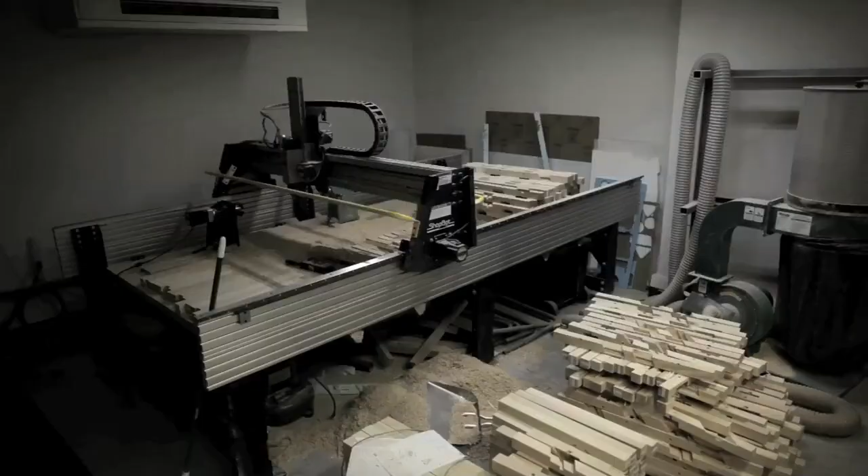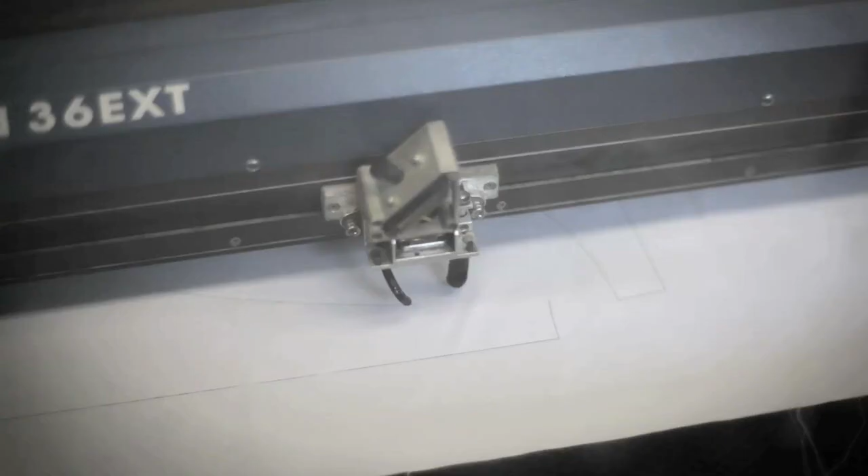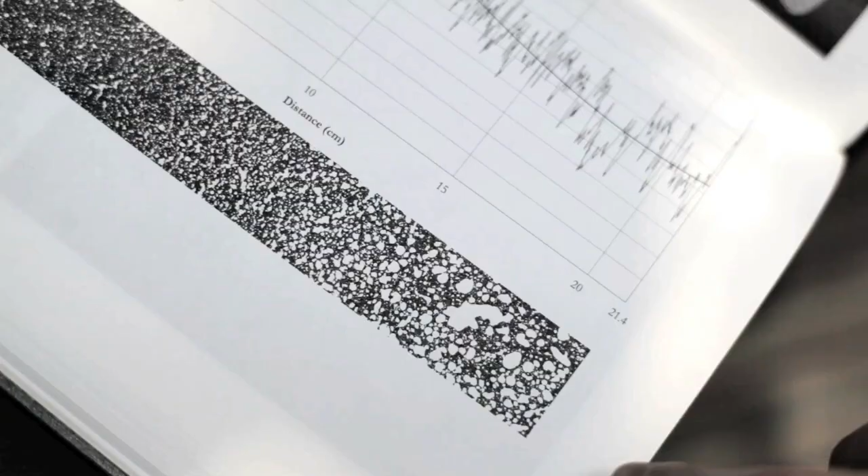MIT is a very different kind of institute. Instead of becoming the recipients of building industry culture, we can now change building industry by the kinds of experiments we're doing in school. MIT has a variety of departments that are so powerful they have the potential of radicalizing what we do in design and in the architecture department. Even the way we've structured our curriculum around workshops and collaborations fosters this kind of cross-disciplinary platform. So we're situated perfectly for the kinds of things that only MIT can do.

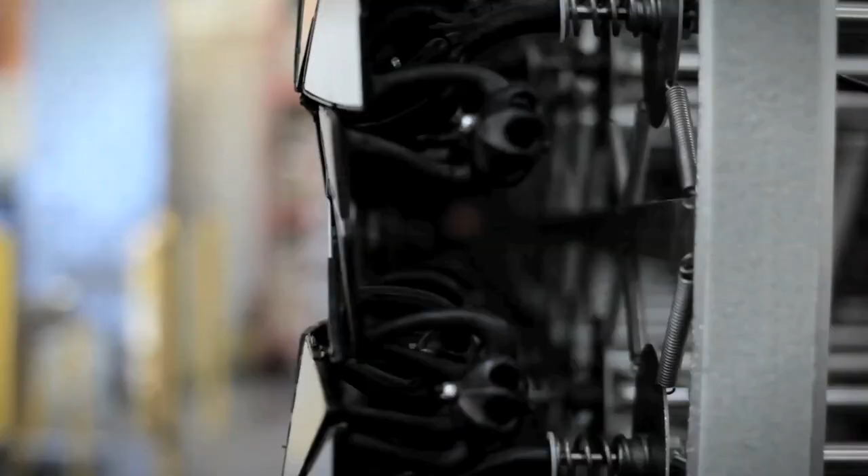The invention of human artifacts of any kind always consists of three elements: the geometry, the process, and the material that constitute that artifact.

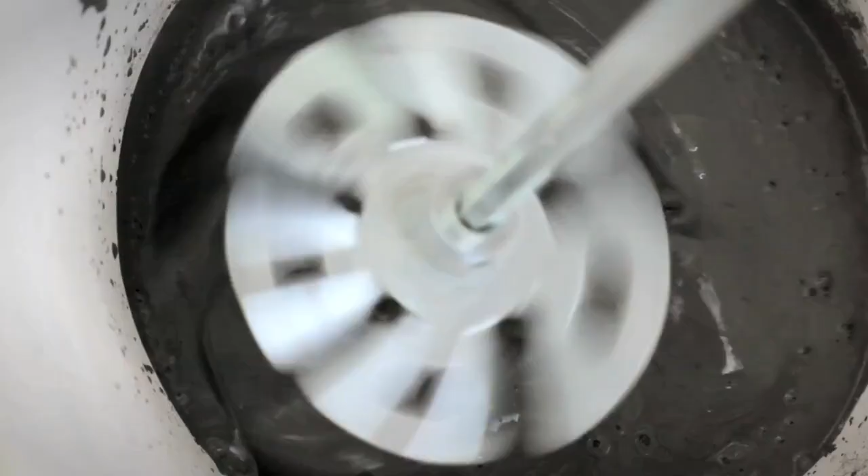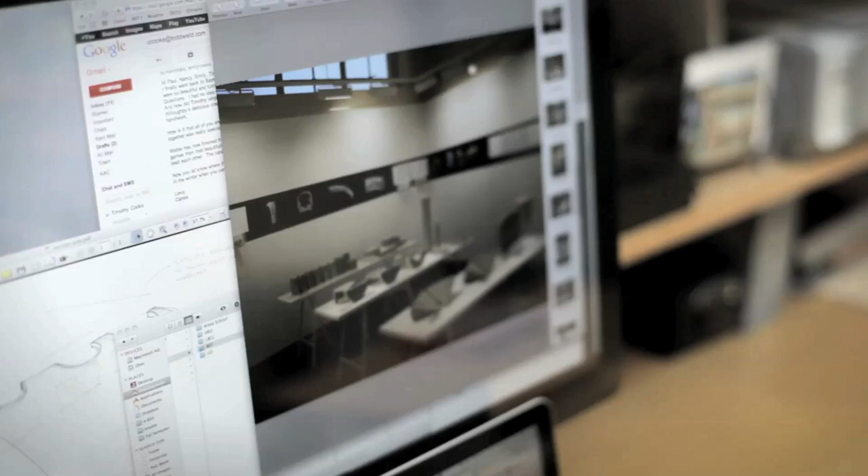It's very clear that new materials engender new forms, and architectural design benefits from addressing and applying new materials in an informed way. The Emergent Materials Group and the Urban Metabolism Group share a central interest in materials for the built environment. Lately, we've been working a great deal in the area of foamed materials, especially foamed cements and concretes.

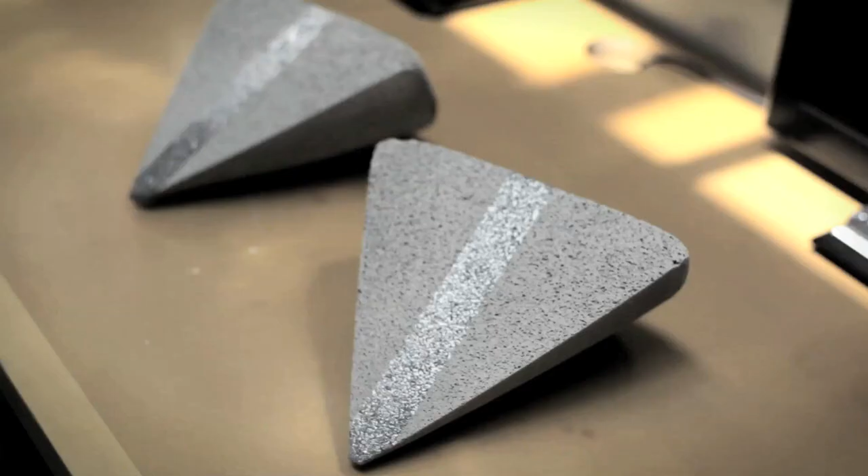Typically, a beam in bending is going to have the greatest amount of stresses on the top and bottom, so we can reduce the amount of material on the interior of a beam.

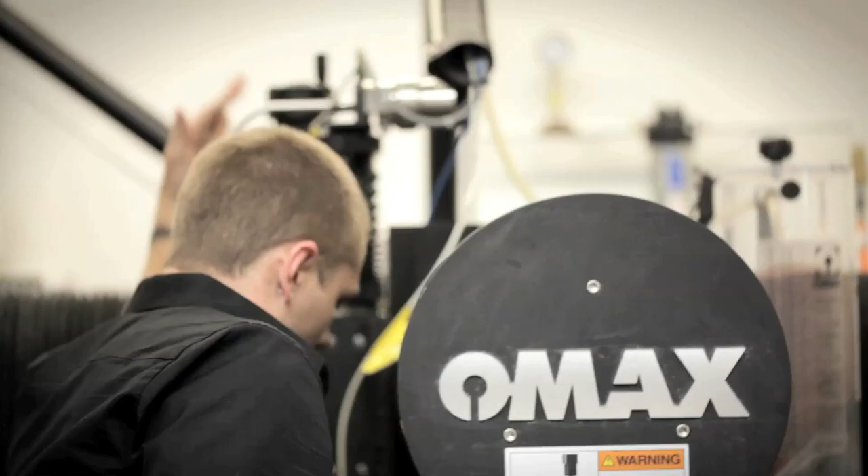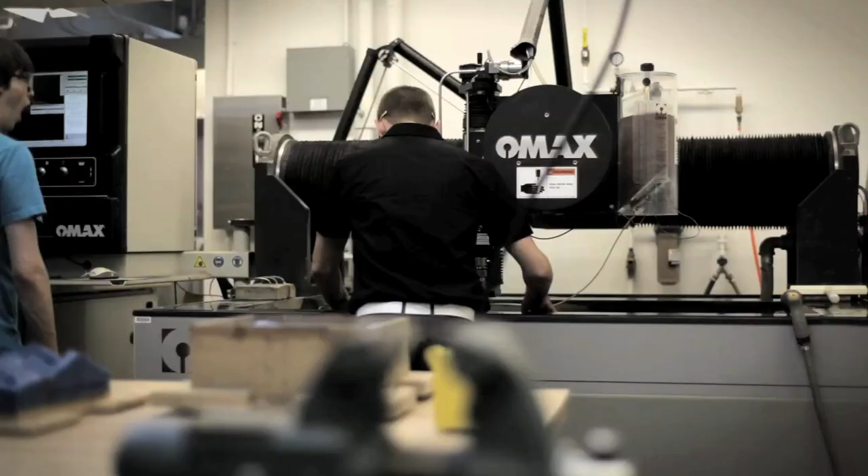The work really tries to address that there's two main paradigms throughout almost every industry. One paradigm is what can you design, what can you compute or analyze, and the other paradigm is what can you physically construct or what can you build.

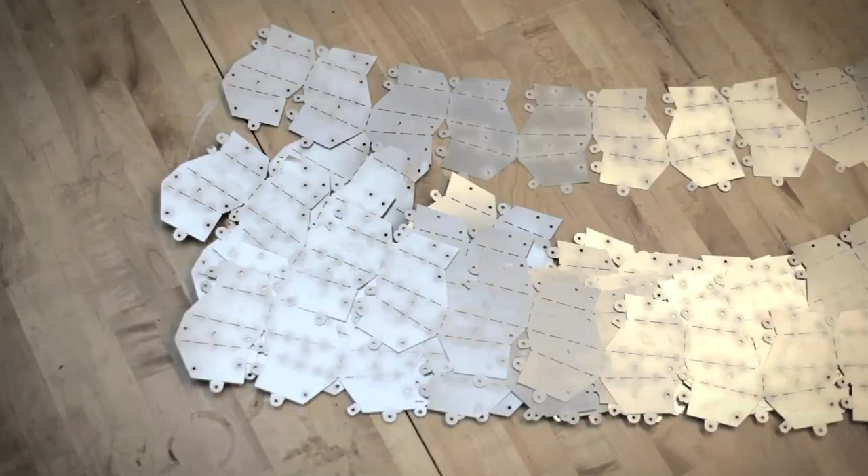The work really tries to traverse all scale lengths. It tries to work from the nanoscale, which is traditionally where we see self-assembly in biological and chemical examples, and it tries to bridge that and say, can't we use this phenomenon of self-assembly as a new paradigm for building things at large scale?

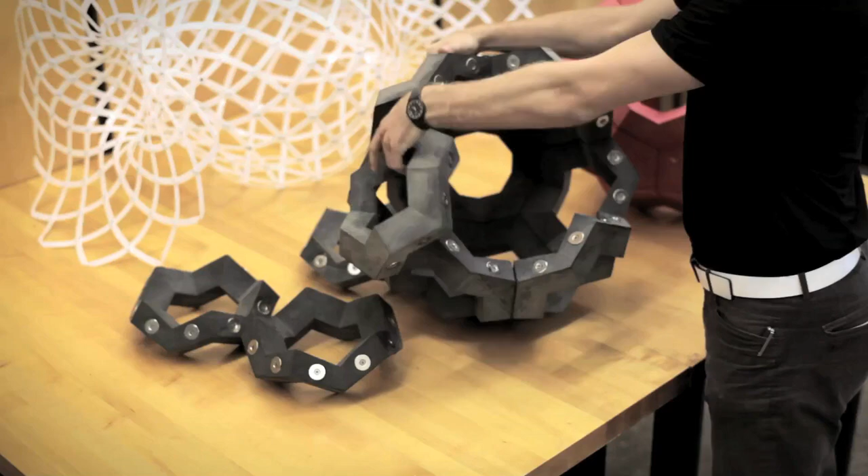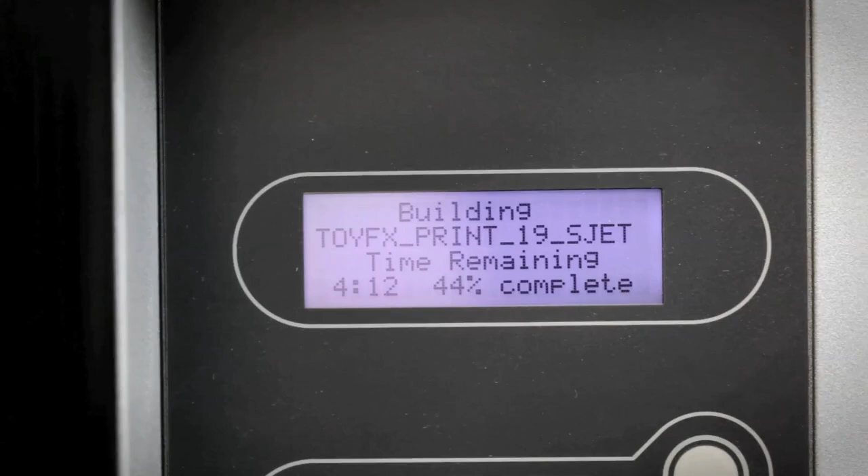We work with any type of material, synthetic or natural, and really try to design specific geometries that have materials in mind. When you design those two together, they can respond to energy. The energy sources can be heat, shaking, gravity, pneumatics, electronics—you can use any type of energy. When you mix that with the geometry and material properties, they can respond and change state.

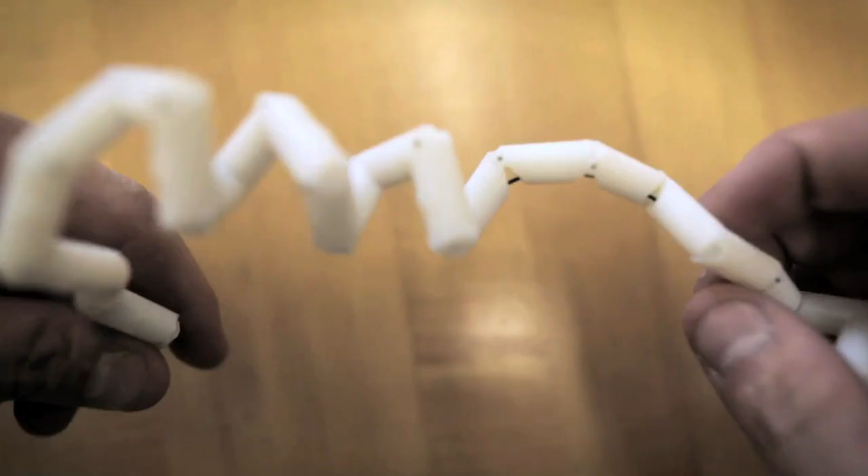Primarily, it will first be applied in extreme environments, scenarios where it's difficult to build.

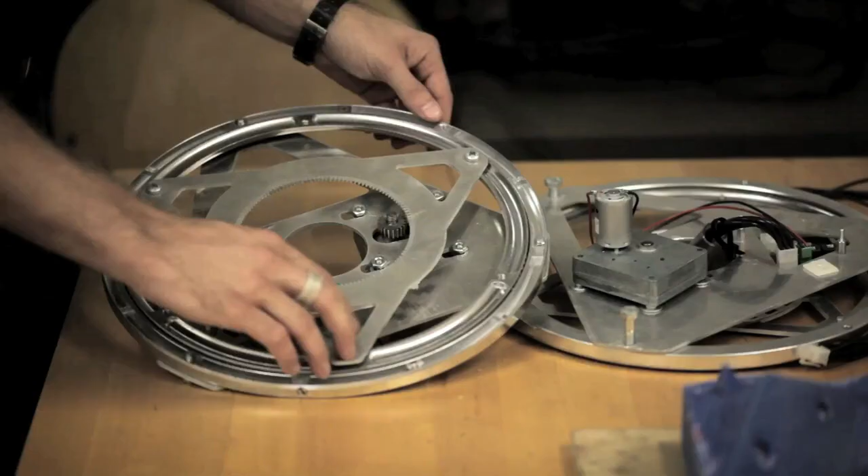The research and the practice is really about cross-disciplinary collaborations between designers, scientists, and engineers, working on this phenomenon of self-assembly, discovering where we find it naturally, where we can use it synthetically, and trying to apply that at all different scale lengths.

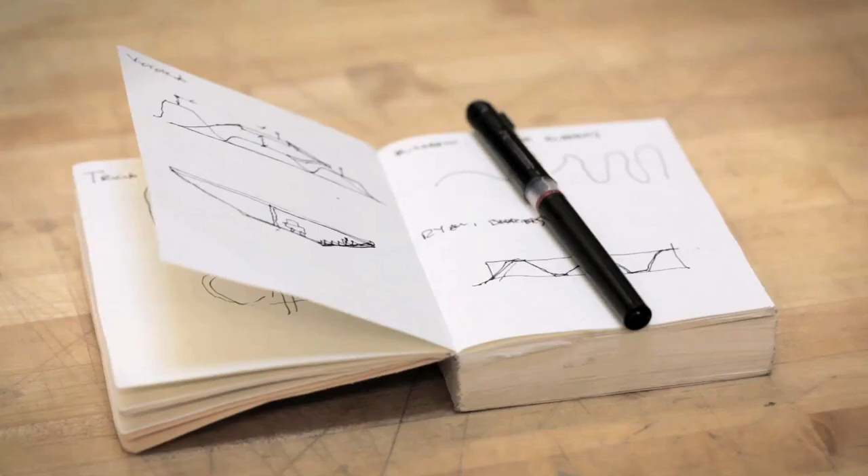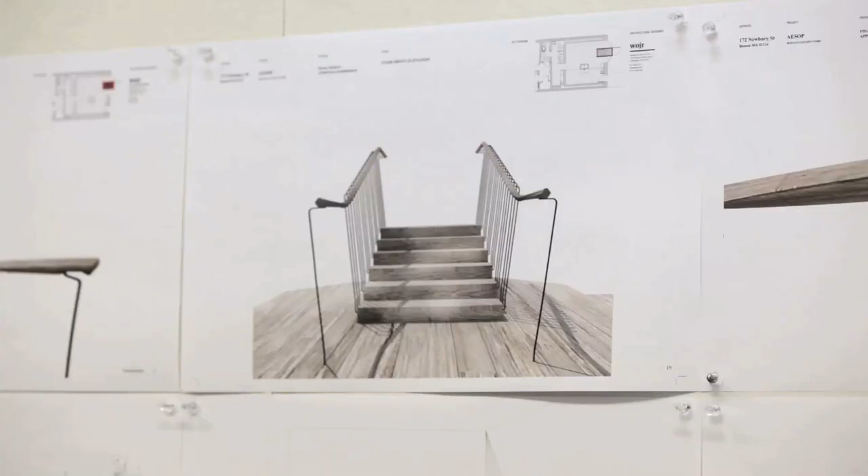The focus of our work, at least at this smaller scale, at the scale of art installations or retail, we leverage CNC fabrication methods, but not as a way to exude their prowess necessarily, but more as a way to help us get at a particular formal agenda.

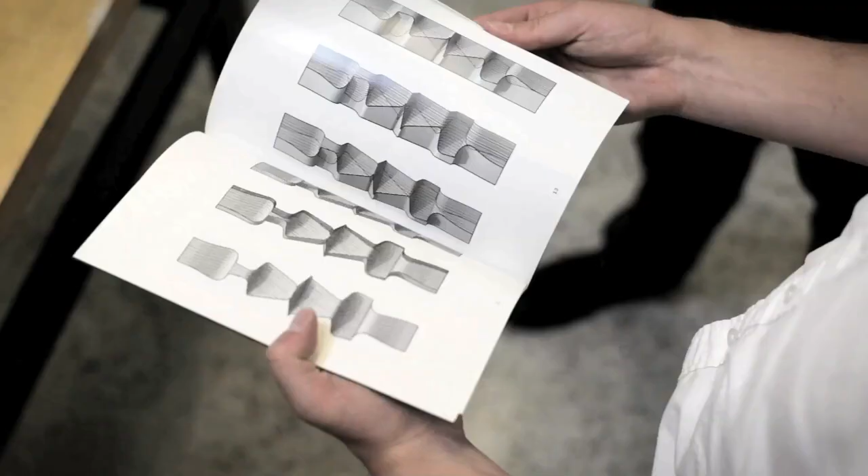An installation called Totems, which in a way is a kind of proto-architecture—not quite architectural, not quite sculptural—I think offers a kind of proposition to each of those disciplines.

We do a lot of testing via 3D prints. A lot of the formal investigations for Totems specifically happened in 3D prints. We did maybe 30 to 50 3D prints of the totems as a way to understand how the light and shadows were working and how best the anamorphic effects were working before we went to the large format wire cutter.

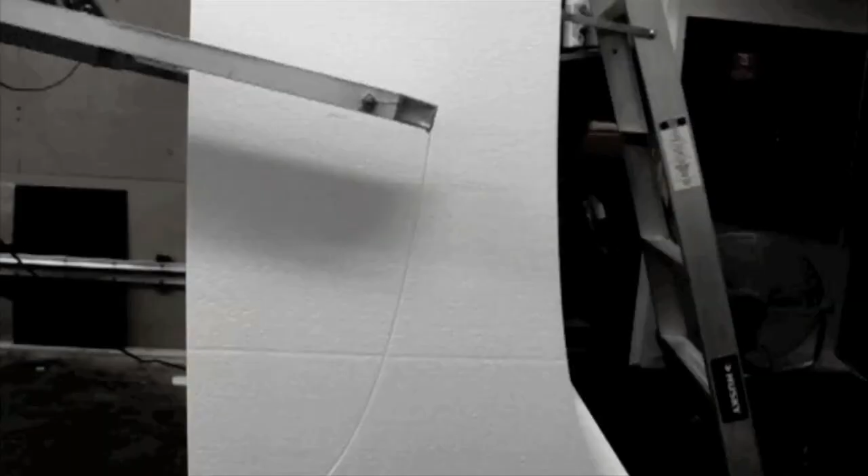In terms of collaborations, some of those happen here at MIT. Joel Lamere and I are developing an installation now, which is an anechoic chamber, and the anechoic chamber uses industrial felt both on its exterior and as a way to absorb sound on the interior.

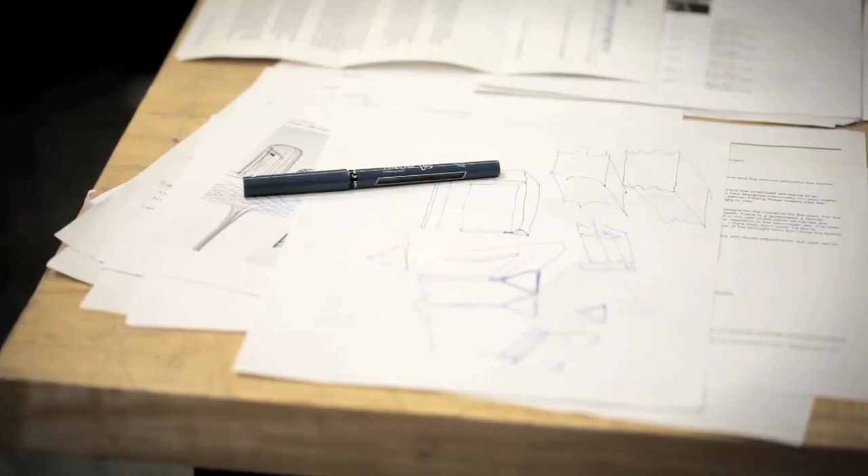I'm bringing a kind of disciplinary or formal or geometric interest on the one hand, also a certain set of specialized understandings of the behavior of these sheet materials on the other.

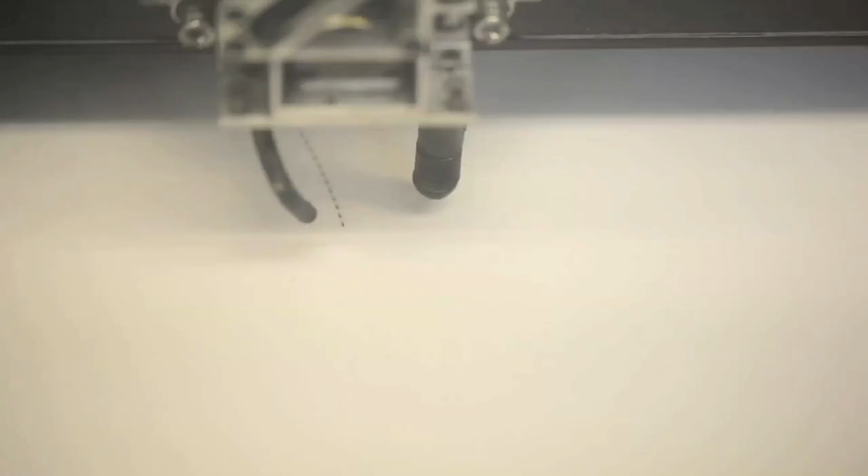My architectural interests are really broad, but in terms of my current research preoccupation, it's about material geometry, specifically sheet shapes or sheet material geometries—how they bend, stretch, stack, fold.

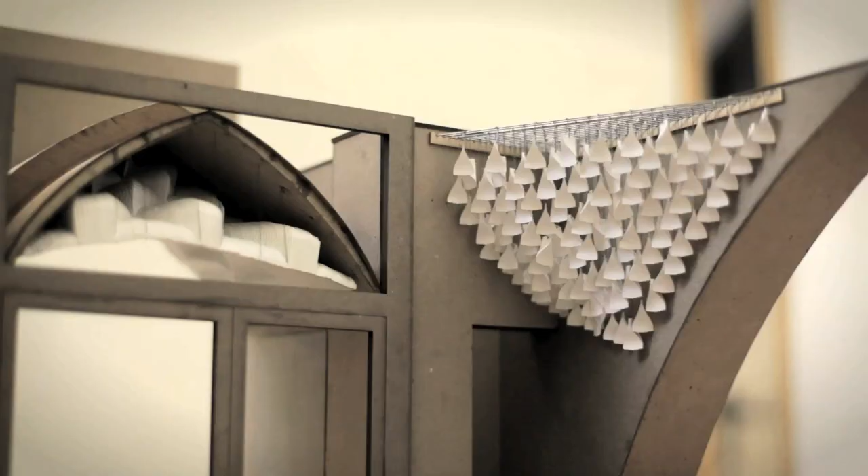But obviously understanding sheet materials is really critical to architecture. It's a long-standing discourse on sheet materials in architecture, in part because it's so ubiquitous in conventional construction. Everything including plywood, sheet metal, steel, aluminum, plastics—all of these have to deal with developable surface geometries, which is to say sheet shapes generally. So expanding the total set of understandings about sheet shapes is a totally and kind of obviously worthwhile architectural undertaking.

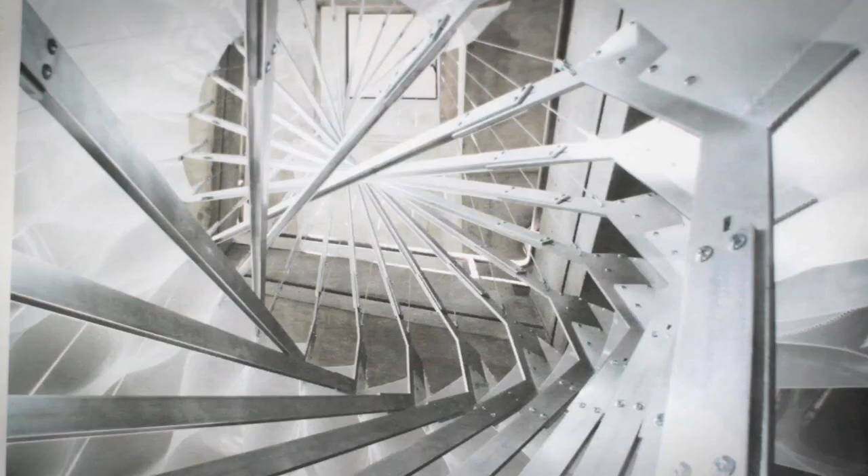These installations attempt to jump from the scale of the paper model to the scale of the architectural space at the very least.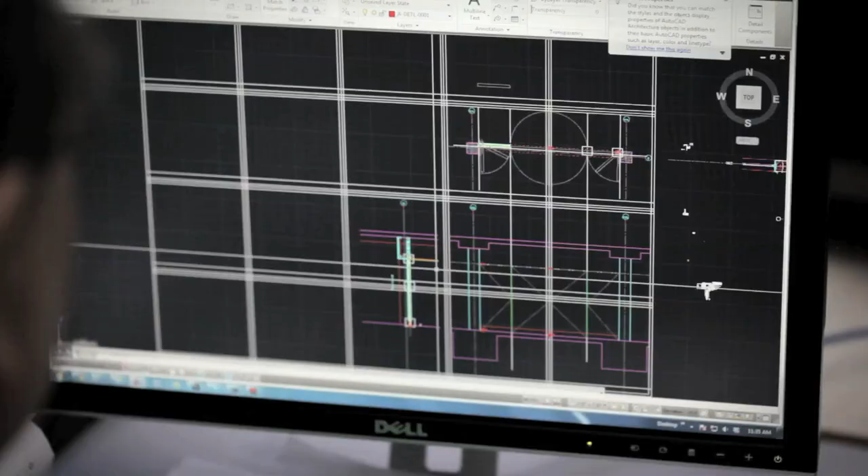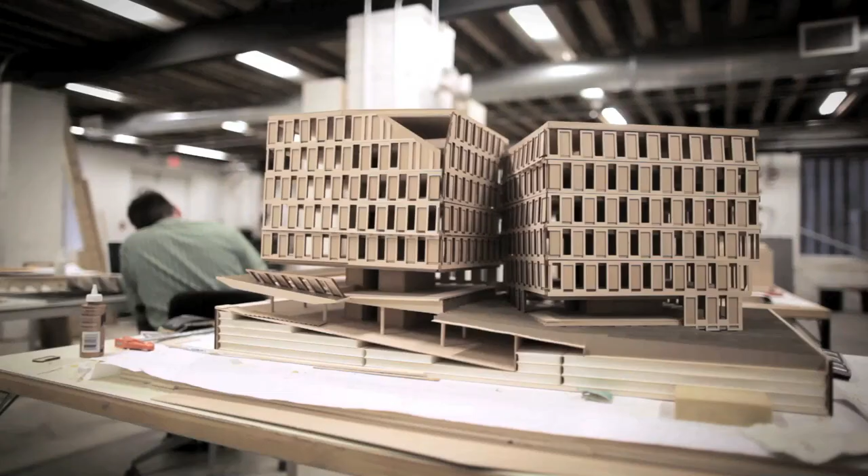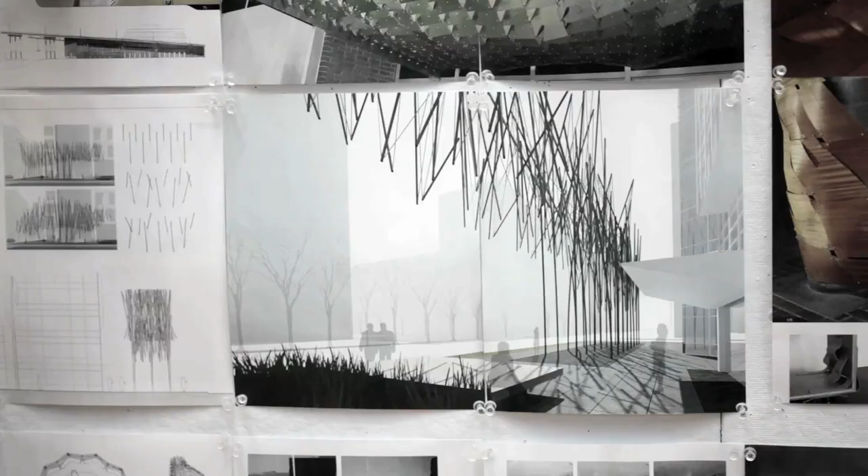Well, over the past 20 years, first as Office DA, now as NADAAA, we've identified two or three areas of focus. The first has been to look at materials and their behavior as a point of departure for many of the architectural experiments we do. The second area is to recognize that materials don't have an endless limit. Everything comes in modules, in sheets, in blocks, in bricks, and without aggregation, there's no way of figuring out how construction works in general.

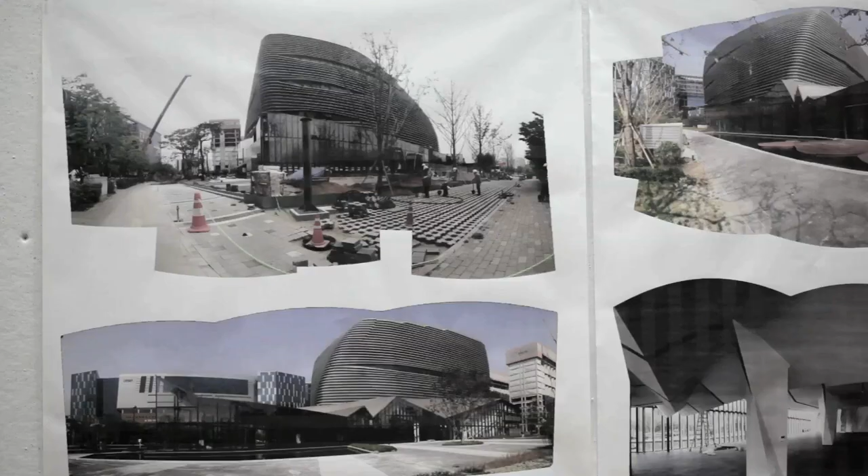So this has been a kind of point of revolution for a range of projects that we've researched and undertaken, some of which are at the scale of a piece of furniture, others at the scale of a building, and others that are really at the scale of urbanism.

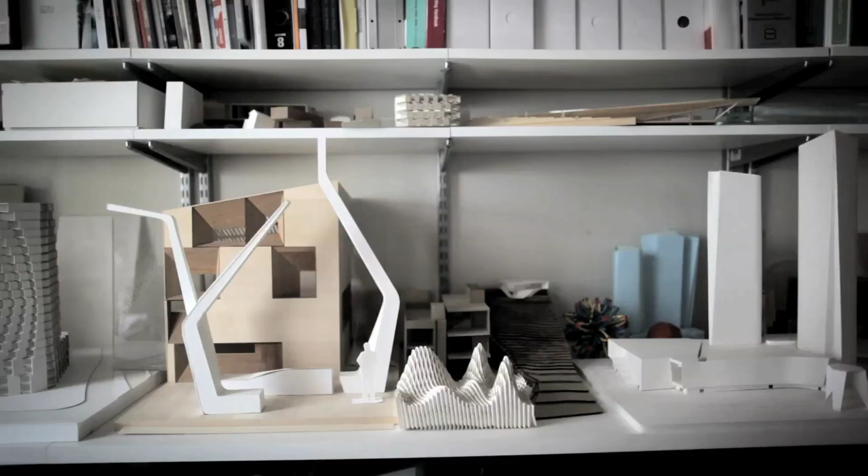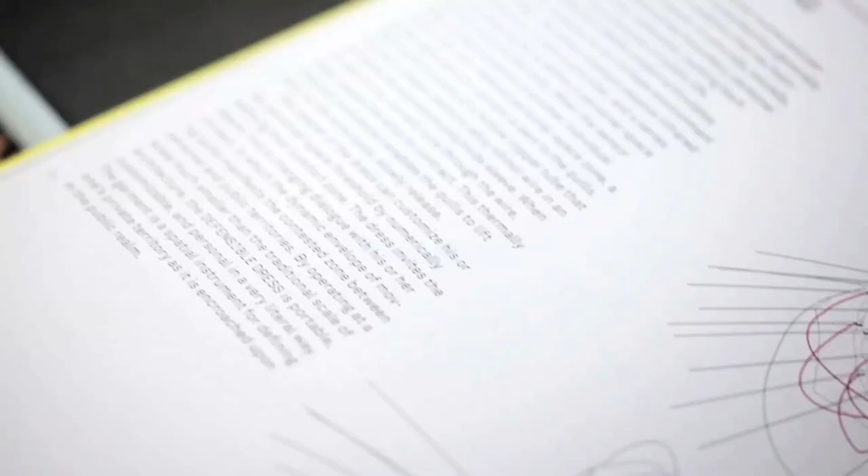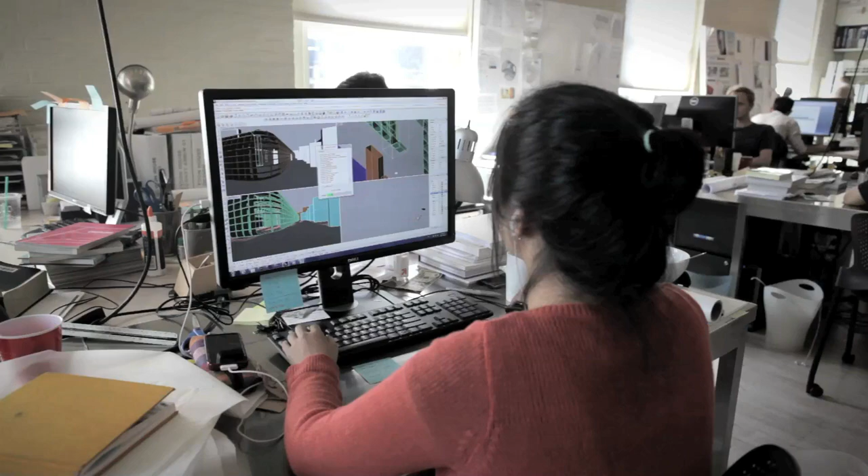One of the agendas of the studio is to create interactive architectures for public space through design and technology. These projects can range in scale from the scale of the body, such as the Defensible Dress Project, a wearable architecture which uses a microcontroller and shape memory alloys to defend your personal space, to very public scale infrastructural projects, such as our proposal for the Audi Urban Future Initiative, where we're speculating on high-speed regional infrastructure and transformations in the city around issues of mobility for the year 2030.

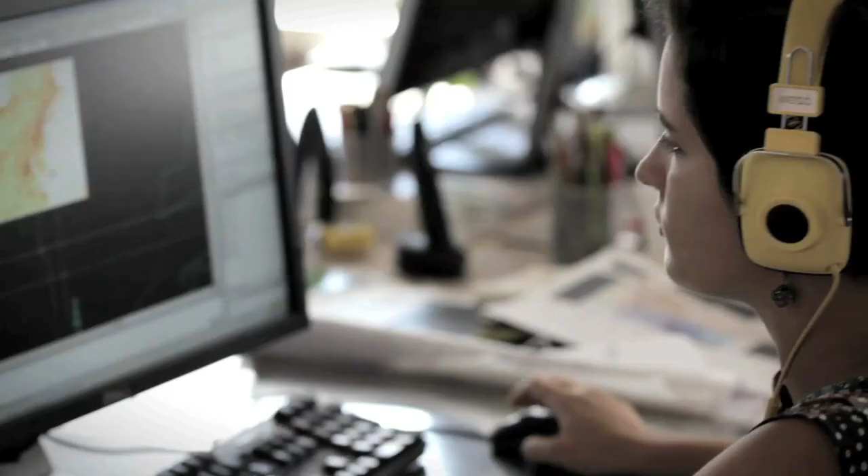It seems now more and more necessary that our environments have to become smarter, more responsive, and more flexible. The way in which architecture is made needs to be completely rethought if we're to go beyond bricks and mortar to engage the challenges of the next century.

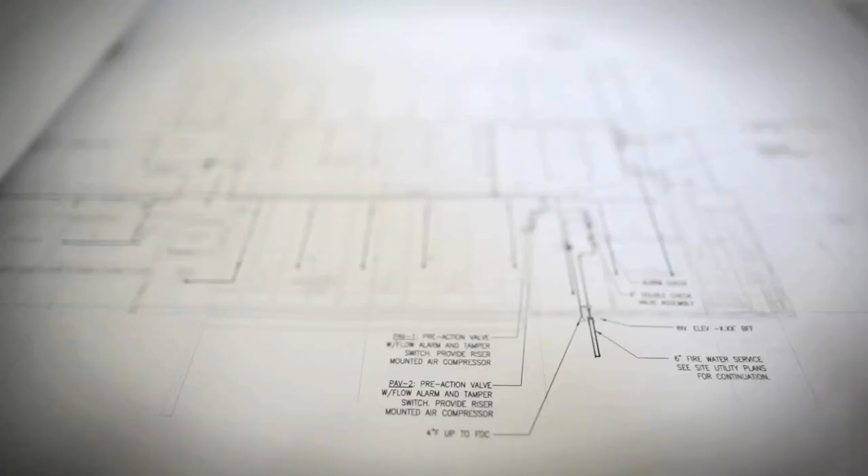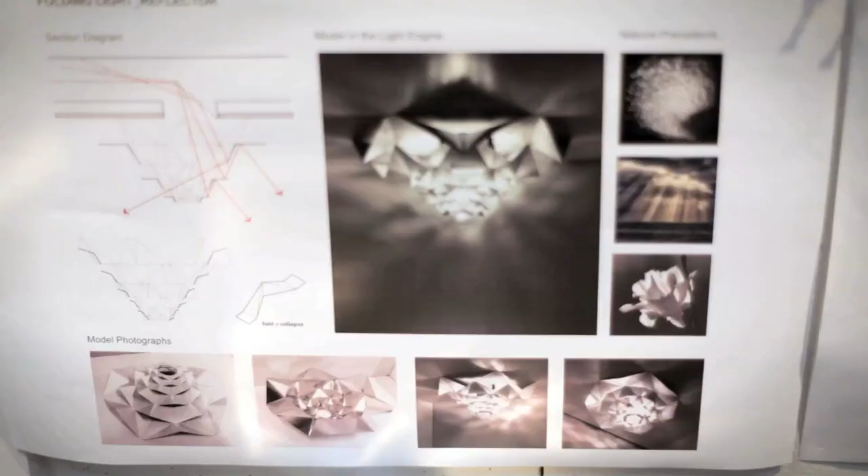My work as an architect focuses on designing architecture and urban scale interventions that engage the emergent infrastructure of our time. We're interested in how design engages that mutability between energy and matter, when materials generate energy or store it, when materials are dynamic and change state, exchange heat, produce light, or communicate information.

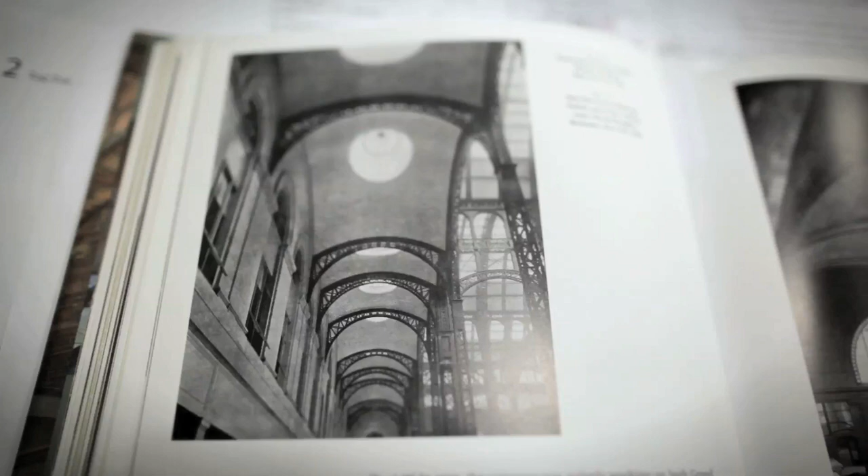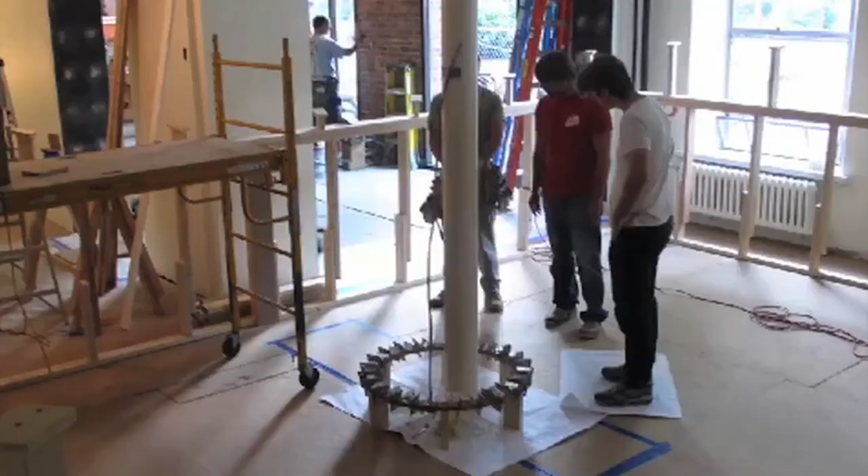The challenge, I think, for the discipline of architecture today isn't in digital fabrication, it's in material fabrication, in thinking about what it means to be material today when we move fluidly between digital and physical realms, how we use materials and not waste them, and how we form materials and how we transport them.

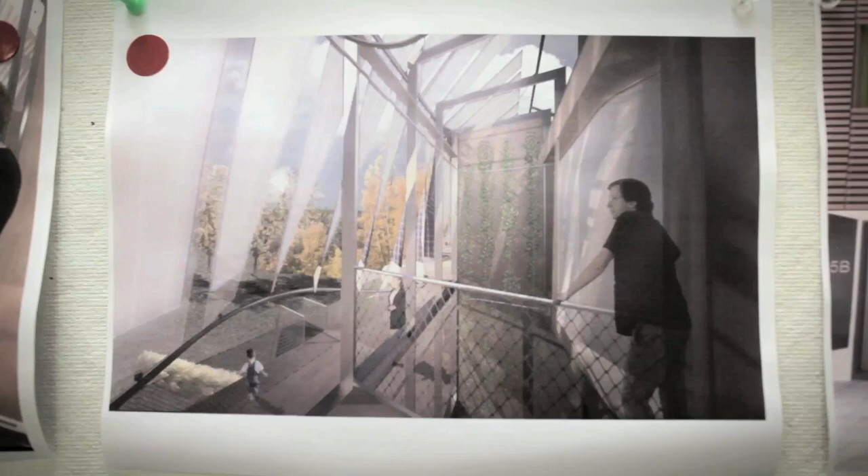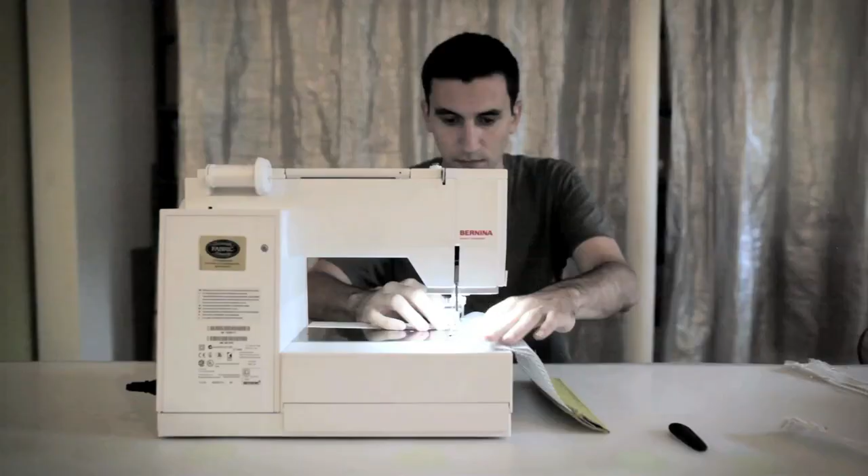If we're going to change the building industry and regenerate an innovation-based manufacturing segment in the United States, then I think we need to do this from within practice, from working with the norms of the building industry, but not settling for those norms, instead innovating to both accept and transform those standard conditions.

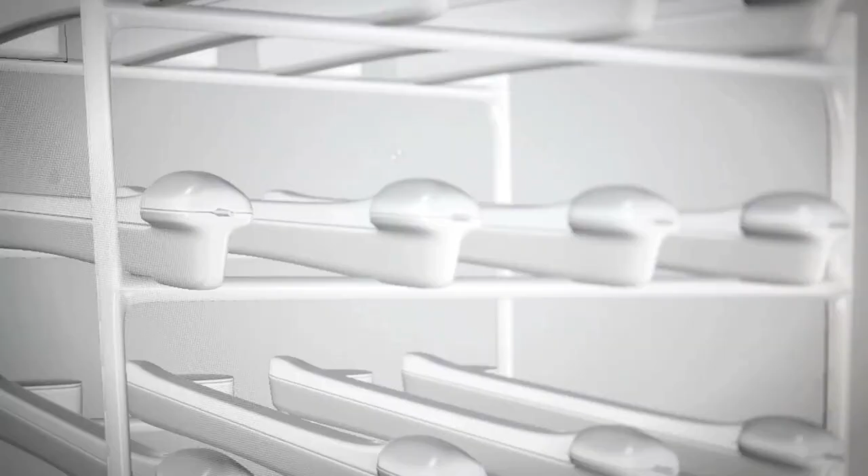I think we're pursuing several initiatives relating to computational material at several different areas. Dynamic interactivity is one, with HypoSurface, and we're driving that forward, imagining actively alloplastic environments, if you like. It's a demonstration of the power of computation come real time.

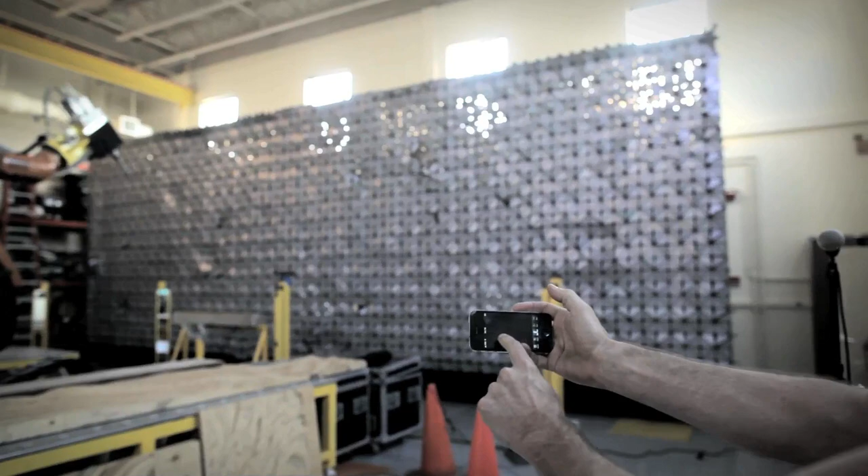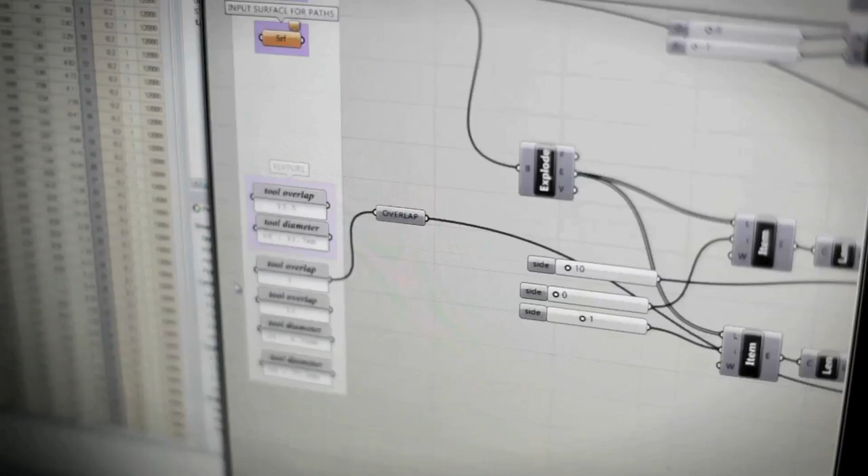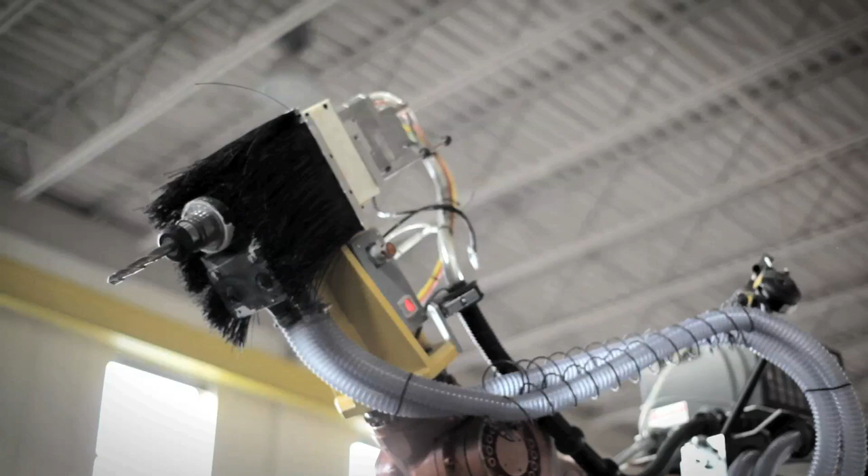Then in the robotic manufacturing work, we're looking for power, information and material all coming together, but with control directly at the architect's workplace. So we're developing tools that allow architects within their native software, like Rhino, to pilot a powerful production machine like a KUKA robot, demonstrating what will be the future of manufacturing: sophisticated algorithms and modeling that link directly to sophisticated manufacturing machines and allow both new efficiencies and new versatilities, new formal complexities.

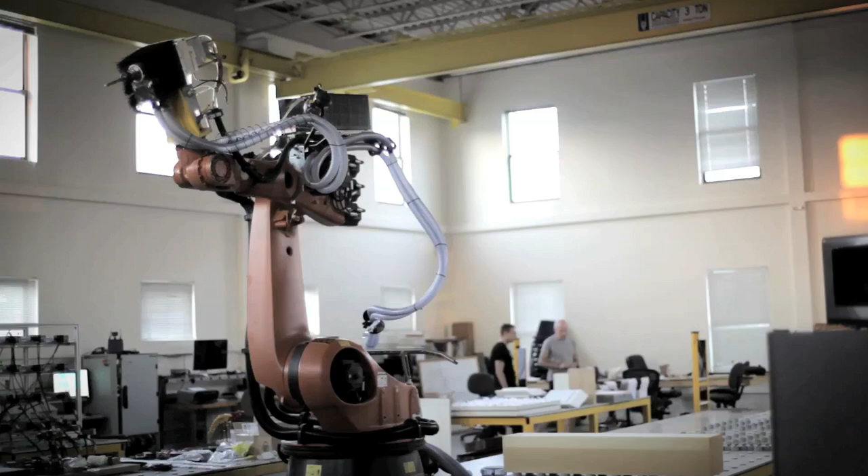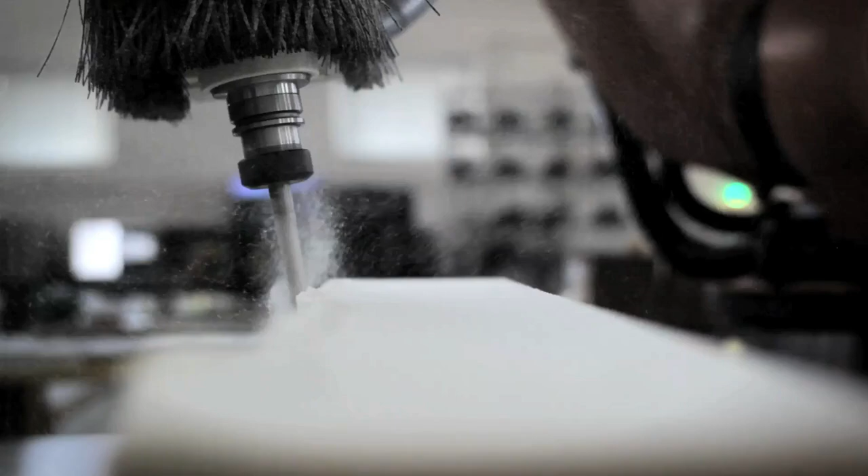I'm also frustrated by the slowness of the building industry to innovate materially. There's a fantastic amount of research in material science that's pent up and is just dying to come out, at a period where environmental concerns are becoming so enormous, and the challenge of building the developing world is so extraordinary that they're necessary.

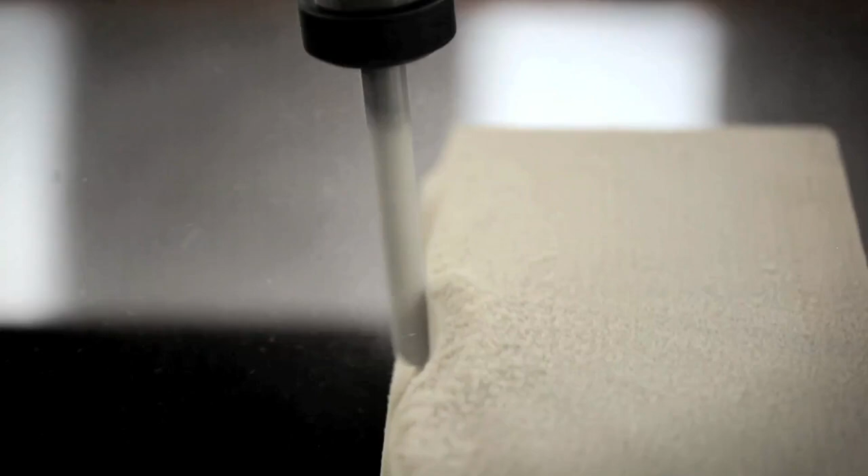CAD/CAM meets material science, like composites, I think, is going to breathe a whole new life into the architectural and building industries.